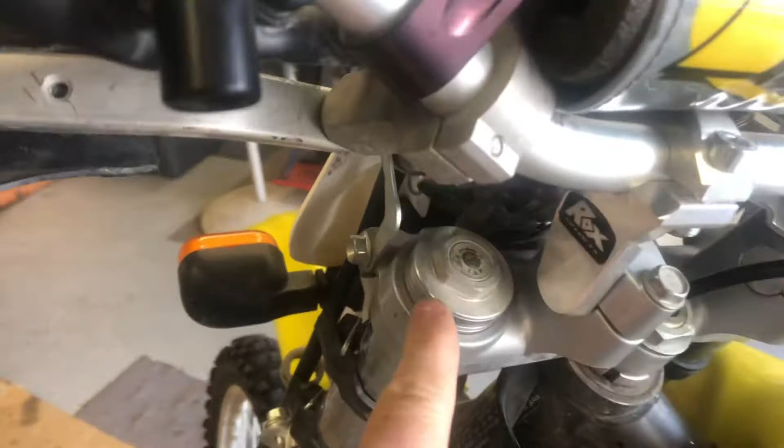their DR650. Kind of similar to the original forks on the DR350, except those were damper rod and these are cartridge. These are a lot better forks, and they have adjustability, compression and rebound damping.

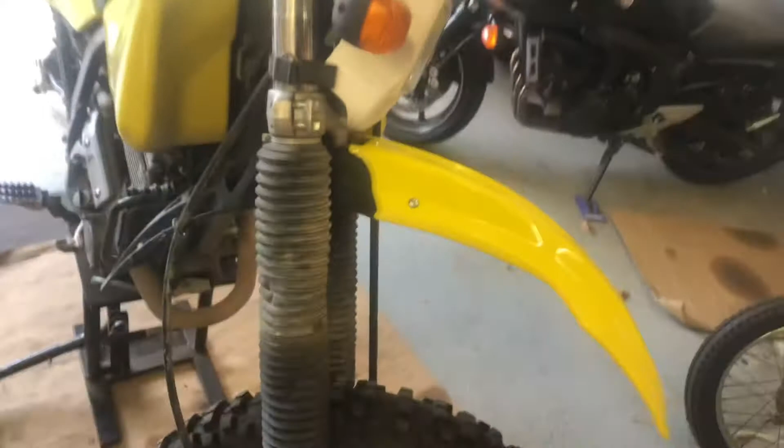Anyway, first thing I'm going to do is get the wheel off. I'll get the brake off of here and I'll pull the fork leg off. It's all pretty simple stuff. The biggest tip I can give you before removing the fork is to loosen the top cap. So what I like to do is loosen this upper clamp bolt and then break this loose before you get this out. Just makes it easier.

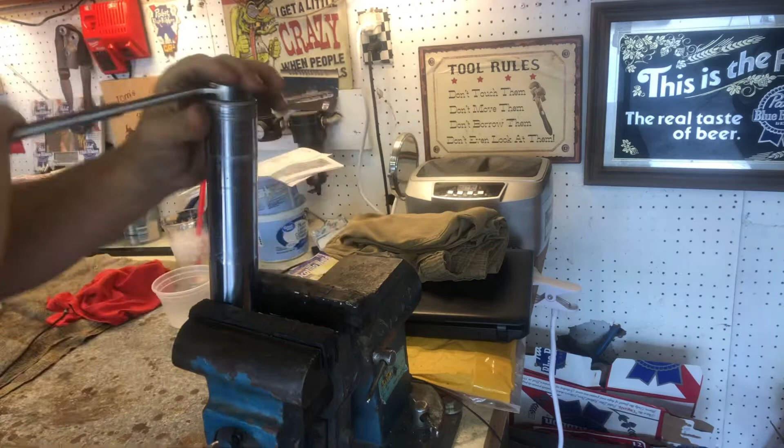All right, get you to stand here. Now, since I've already loosened this cap, it should be pretty easy to get it off. There you go. That might be a little bit better. These are 24 millimeter. And it is going to be under a little bit of spring tension. Actually, it shouldn't be under any spring tension right now. The bike is off the ground. So loosen it until it pops up.

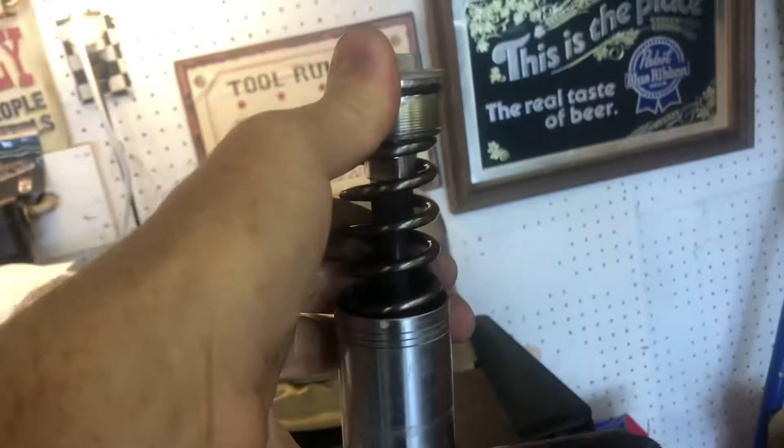We're going to slide this down a little bit. There we go. And now, to remove this cap, let me slide you in a little bit, maybe. See if we can zoom in. You have to hold this damper rod, or whatever. I might get some of the nomenclature wrong as well. This rod down here, you have to hold that and turn the cap. So I'm going to see if I can get a small wrench in there and hold that.

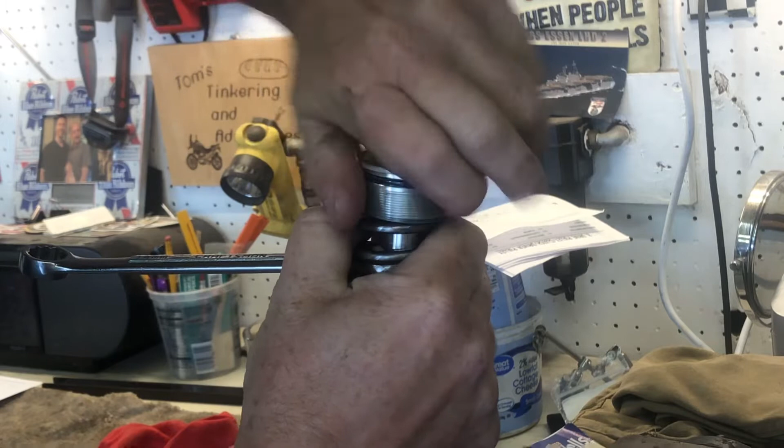Okay, it's a 14 millimeter on that. And then you spin the cap off. And when we do this, this rod is going to slide down into here. Now in the past, getting these back on can sometimes be a pain. So I'll stick another smaller wrench underneath here. We'll do that when we reassemble. I'm just going to stick that there so that rod doesn't slide down right now.

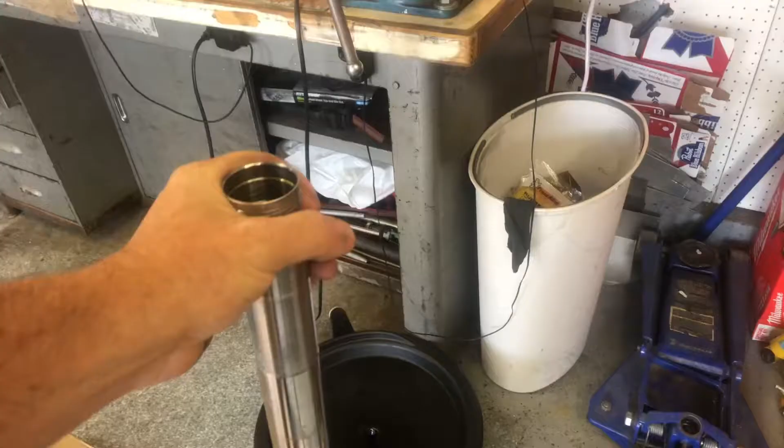There we go. So, there we go. And that's for the preload adjustment here on the top, or the damping adjustment. All right, now we're going to pull the spring out of here and we're going to drain it. So I've got my drain pan sitting right here.

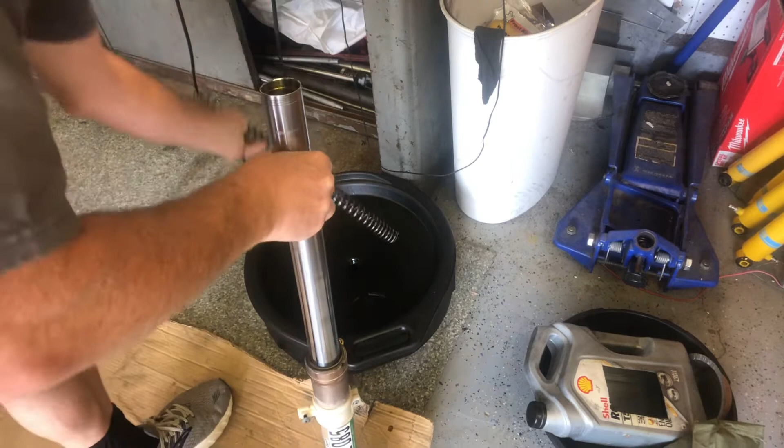And we'll just dump that out. Fluid actually doesn't look too bad in this one. Sometimes they look pretty dark and awful. And you can just cycle it through. And what I like to do is hang it from the vise I have right up above here and let it drip drain for a while.

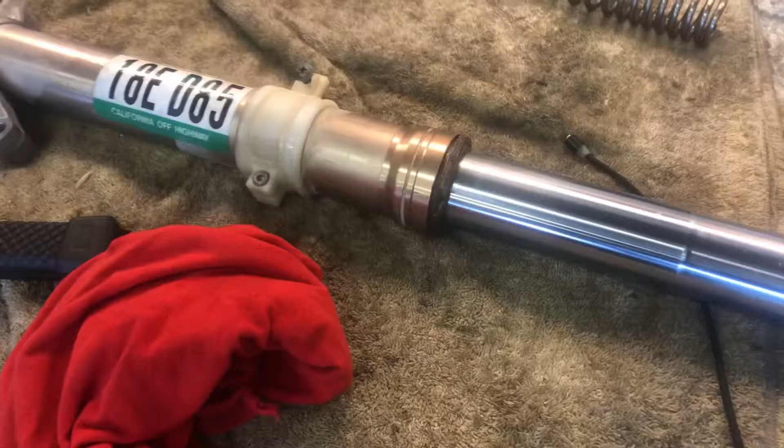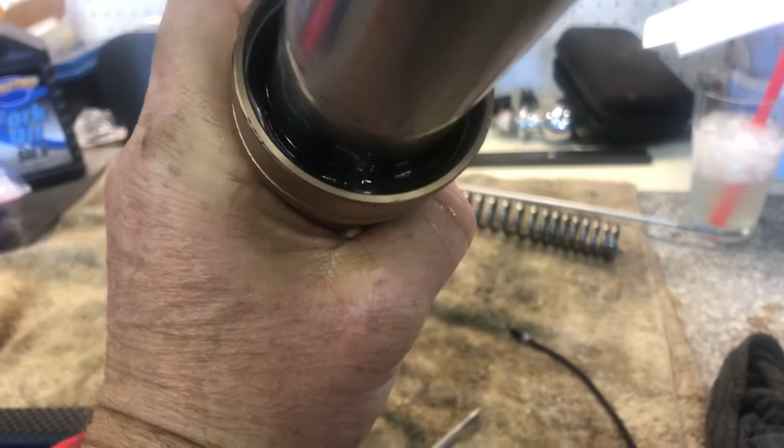Now that we've got her mostly drained, we can remove our dust cap here. I've already kind of started it. These are a little different than a lot of them that I see. It's kind of got like a metal ring around it. And then, let's see if I can get you inside of here. Inside of here, there's a little spring clip. It's not going to be easy to get you in here and do this at the same time. We'll see if I can do it though.

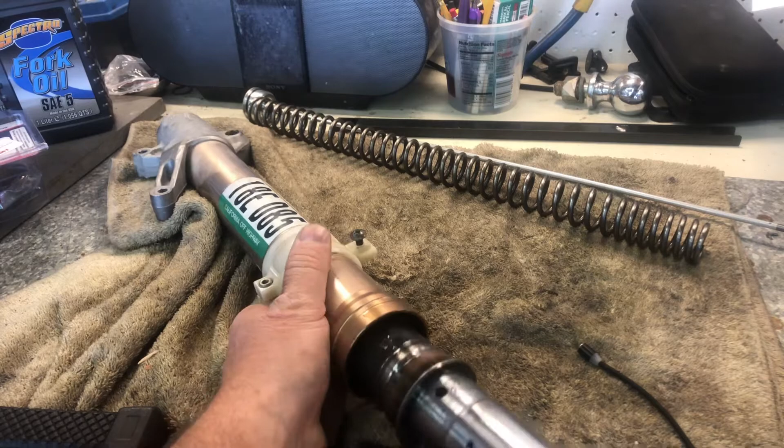There it is. And you should be able to just pry that out with a small flat tip screwdriver. There you go, see that? Shazam. Okay. And now we should be able to use the fork piston here as kind of a slide hammer to pull our seal out. Boom. All right. There's our seal and our fork bushing.

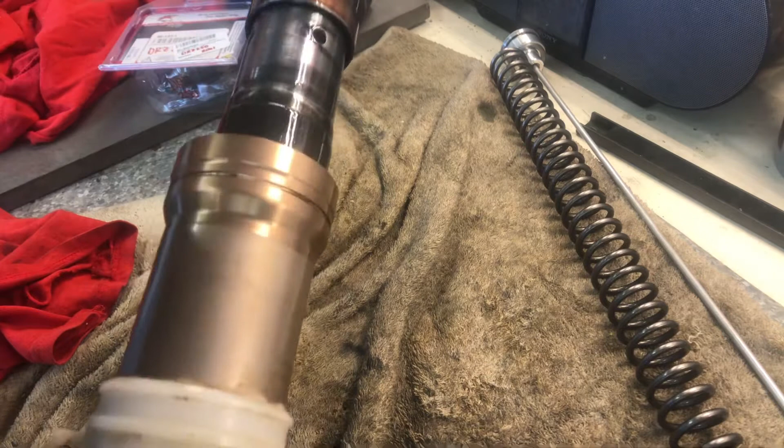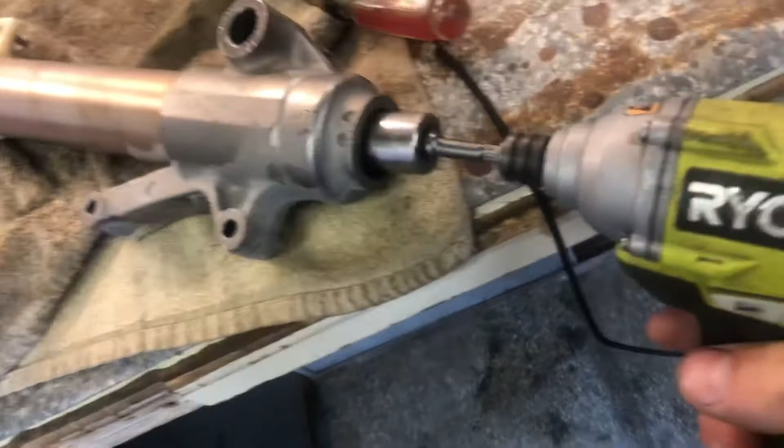At this point, you could just slide this fork seal off and replace it, clean everything up, and refill it with fluid. I want to disassemble this thing a little bit more so that we can clean it completely. So, right now, you can't get this fork piston out. In order to do that, you have to remove this adjuster on the bottom. Looks like that. And now the whole thing will come out like that. So now we can clean everything up.

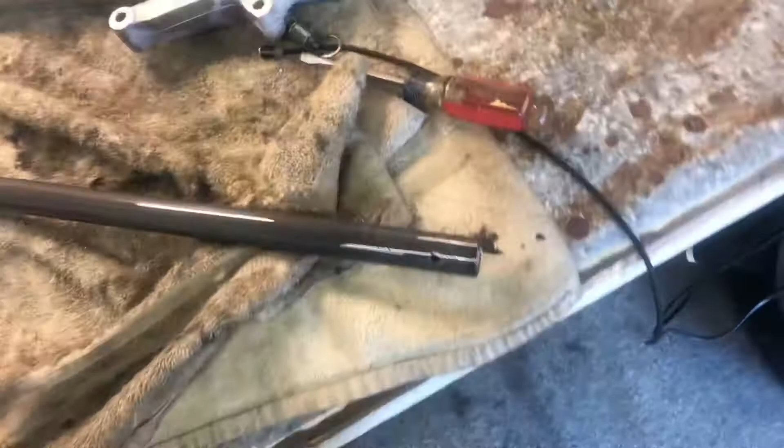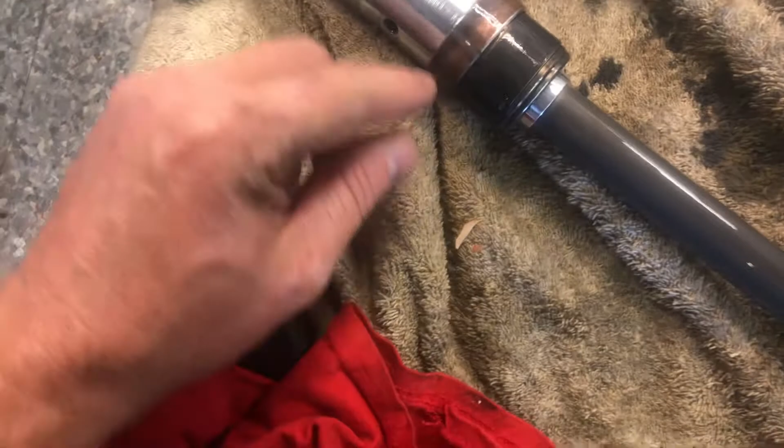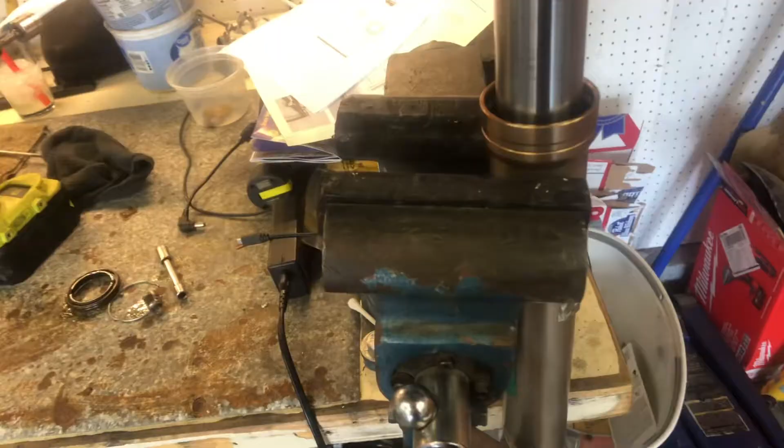So I'm gonna get everything cleaned up. You can inspect your bushings, replace those if needed. These don't look too terrible. It's never a bad idea to replace them though. And then once I get this all cleaned up, we'll reassemble and install a new fork seal. I got everything cleaned up, put back together. I like to leave the old fork seal on here, just in case you get a little confused. You can always use it as a reference as to how to put the new one on.

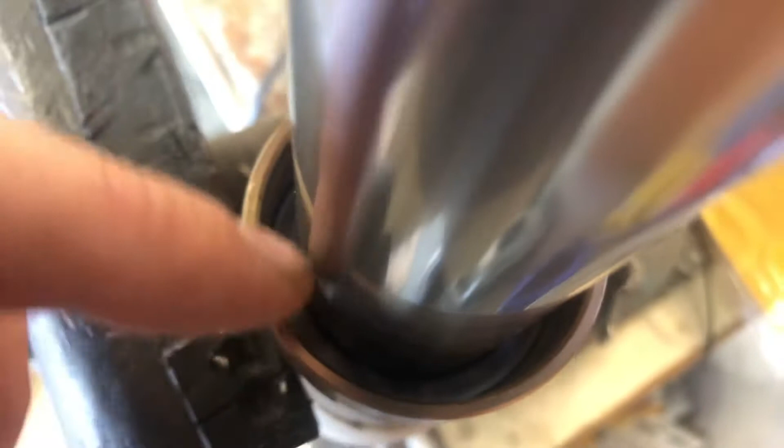Now before you get the fork seal in, there's a bushing and a washer inside of here. There's the washer, the bushing is in there. That bushing has to slide into a sleeve, a little recessed cutout in here. So you got to make sure you get that all the way in, otherwise your fork seal won't go in.

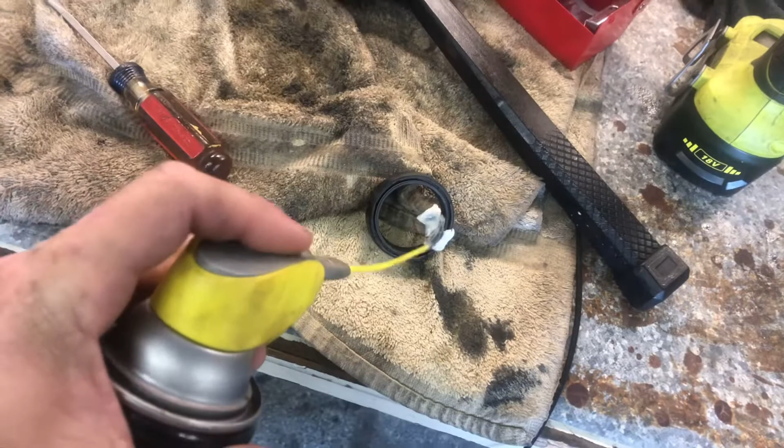Now, you get your new fork seals, you can put a little bit of oil on them. I got a little bit of white lithium grease here. I'll just put a little bit on there. Not as easy to do one-handed as I'd hoped. Okay, and you can see that side and that side. So, like I said, we'll use this one as a reference, even though I already know how it's supposed to go. There you go, there's the bottom. Looks like that.

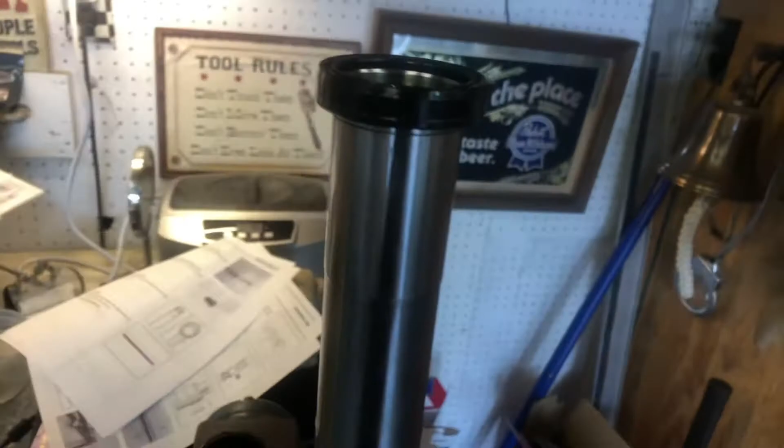Slide that very carefully over the top of here. You can also put like a rubber glove over the top of this or some tape, because it's very easy to cut these if you're not careful installing them. Now I push the fork seal down. It's level with the top of the fork leg here.

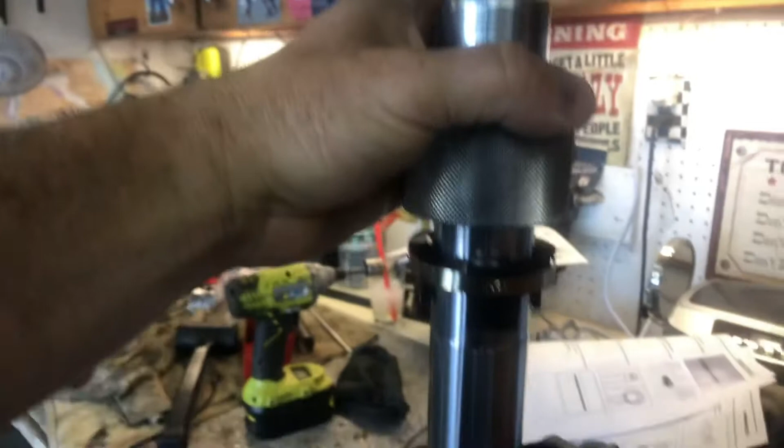Now I'm using a fork seal driver. It's a nice little tool you can buy. It's not that expensive. I have also, in the past, just used the old fork seal, put it on top, and then you can kind of gently tap around that to push the new one in. You can also use like a piece of PVC pipe with a cut in it and kind of tap that down. But if you're going to do the fork seals more than once or twice in your life, one of these seal drivers is really nice.

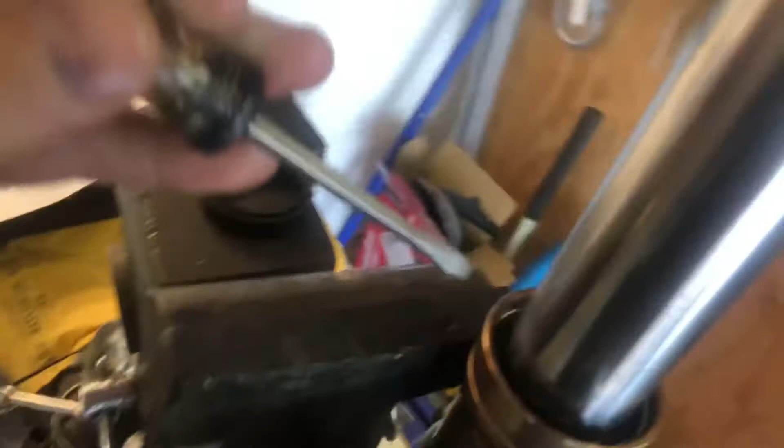Man, caught it. Okay, and then we'll put that bad boy back in there. You should be just about able to push that in by hand, and then using the screwdriver, pop it down in there, and you'll know you have your fork seal driven in enough if that thing seats in there. And this appears to have seated in there.

Now for the new dust seal. A lot of times those just pop in just like that. Okay, now we need to get the spring in here and the rest of the parts hooked up and fill this thing.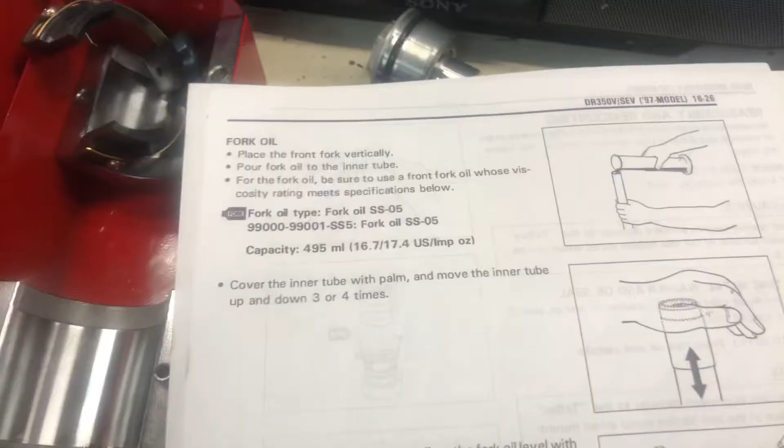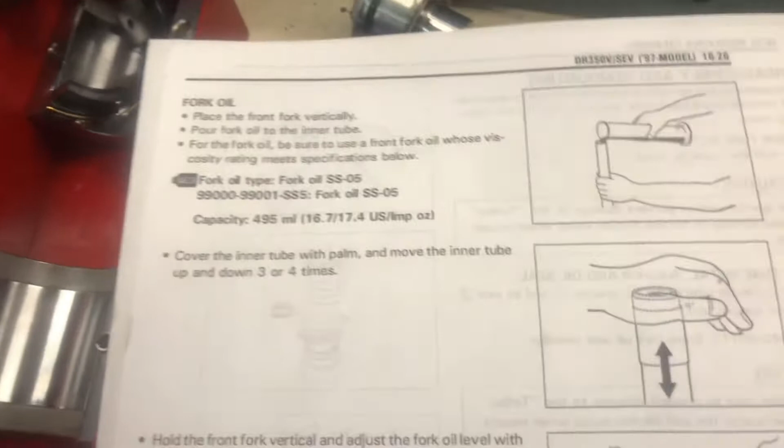So for the first step of filling this up, you get some fork oil. This says SS05. We're using SAE5, and we're supposed to add 495 milliliters and then cycle the fork. So basically we're going to fill it and then move this in and out, which kind of pumps some fluid into the internal workings, the cartridge and such. And then we're supposed to use a fork oil level special tool here to set it at 144 millimeters. So I'm going to fill it up with the 495, and then I'll show you an easy way to make a tool like that.

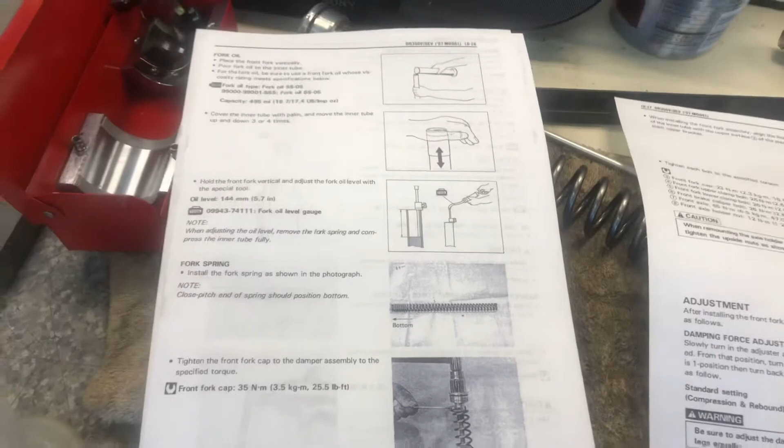Okay, so make sure you got the fork vertical and it's compressed, and the spring is not installed, 144 millimeters. So I have my millimeter tape measure, I have a syringe, a piece of hose, and a hose clamp, and we have set it to 144 millimeters. And all you do is you put this in until the hose clamp is sitting on the top here, and then you just draw on the syringe.

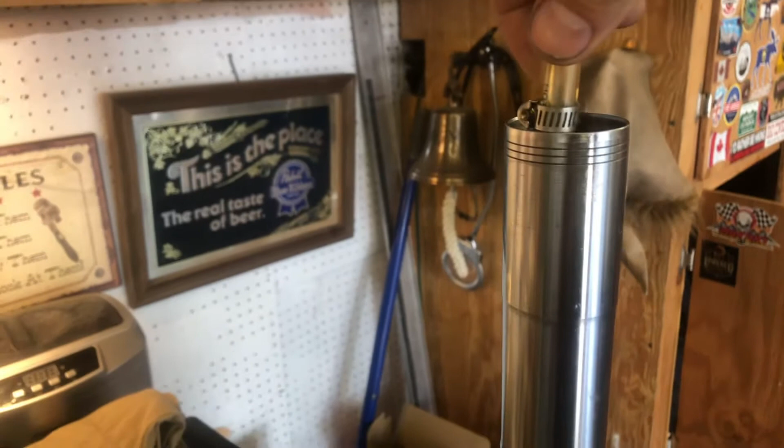If it's drawing out fluid, it's overfilled. If it's not drawing out fluid, you just add a little bit until it's drawing out fluid, and then once it stops, then you're at 144 millimeters from the top. So I'm going to do that. Once again, a good reason to have a manual.

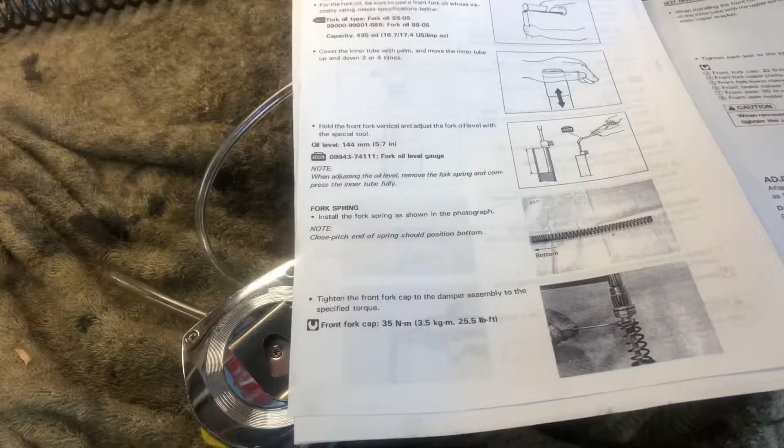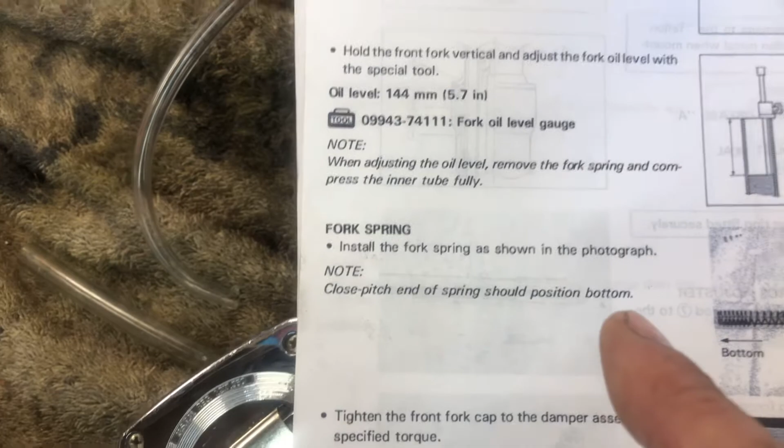Install the fork spring. The close-pitch end of the spring should position to the bottom. So if you took this out and you didn't pay attention, got to make sure you put it in correctly. So we're going to put that in. We're going to get this installed. This is where getting that rod out of there and held up is going to be a little bit tricky, and that's where I was showing you with the little bit smaller wrench underneath it. So I'm going to try to get this kind of set up and show you how that works.

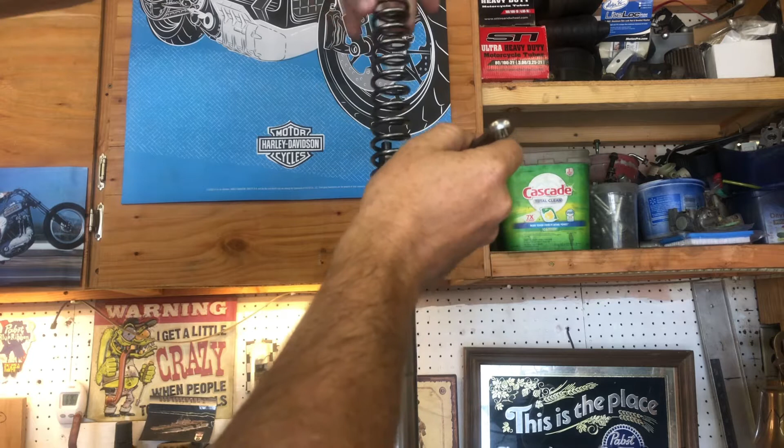Okay, here's the trick I do to make this a little bit easier on myself. So I'll pull that rod out and quickly drop the spring on it and try to get a smaller wrench underneath the head of that. And then you can turn the spring and it works just like a screw, and it brings this thing up to the top. I'm sure they sell a fancy tool to do this, but sometimes a little bit of ingenuity will prevent you from having to buy a tool that you're not going to use more than once or twice in your life. There you go. Now we got it up there.

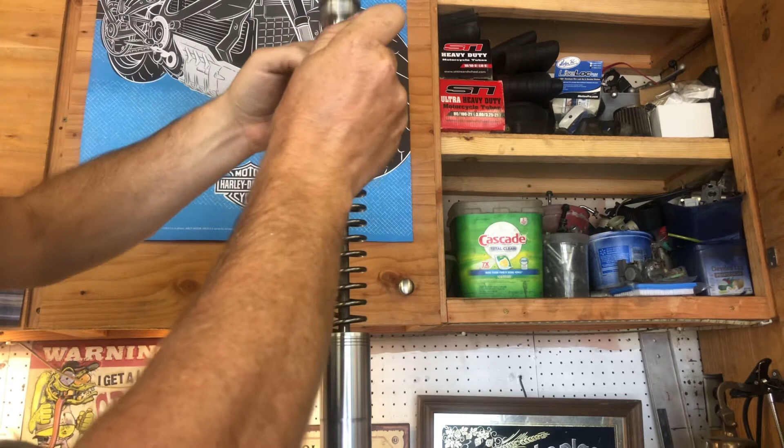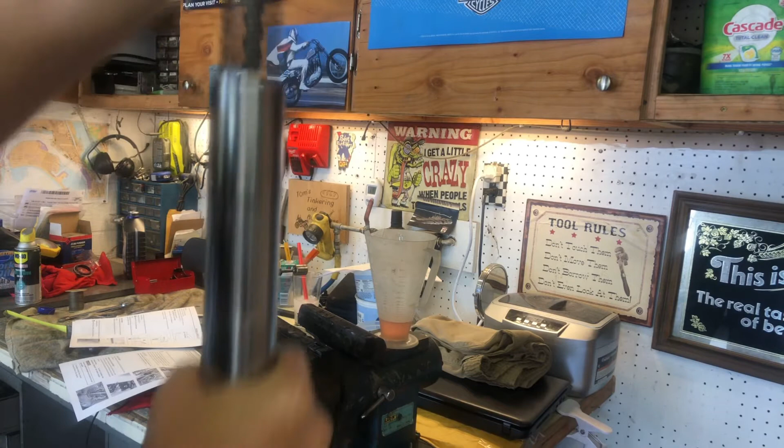We can install our top cap here and get it started. See that? Hopefully you can see it. I need a photographer here. There we go. And now we can install the top cap. Let's tighten that down, and we will tighten it all the way once it's back into the fork, the top clamp of the motorcycle.

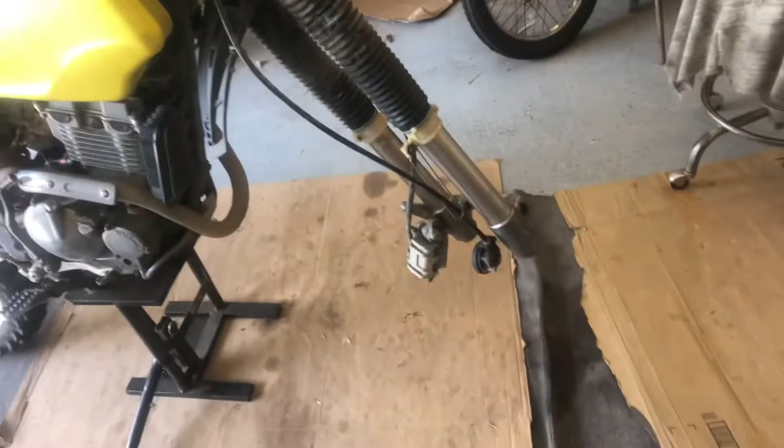And the second fork leg is exact same as the first. Put it all back together. Make sure you torque everything down as per the manual. Install your wheel and go ride and enjoy a non-leaky fork, which is always good because you don't want all that oil getting down there on that brake. Easy peasy.